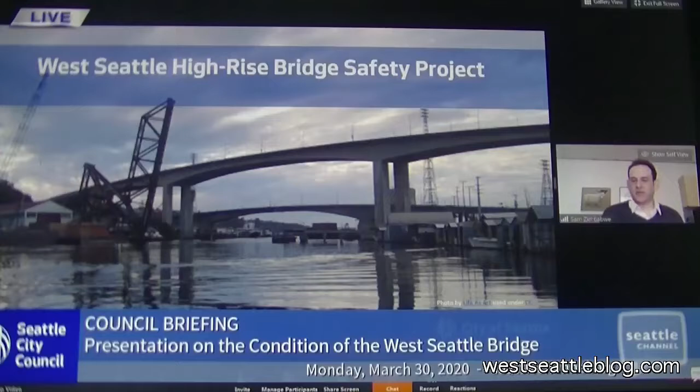So with that, we'll go to the next slide. This is just a brief overview - I'll try to keep an eye on time - but we're going to go through some of the inspection and maintenance history, our decision to close, our short-term recommendations, and what we're doing right now.

What we've done and where we're going from the traffic impacts, where we think we're going from our repair options, a little bit about what we're doing to communicate, and then how we're organizing ourselves within SDOT, and where we see as next steps. We'll try to do that as quickly as possible and then answer questions.

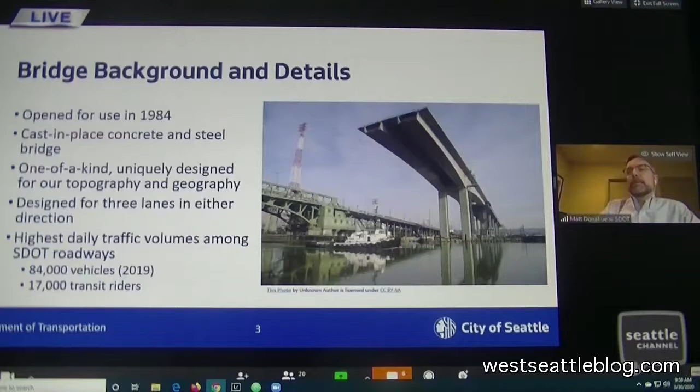Thank you, Sam. Good morning, everybody. So a bit of background on this bridge: it was built in 1980, or opened for use in July 1984. It was one of two bridges built to replace the old green bascule bridges you can see in the lower left-hand corner, after one of them was hit by a freighter in 1978.

In the upper right-hand section of the photo, this is actually a construction photo from when they were building the high-rise. You can see it's two cast-in-place segmental concrete box bridges—basically a reinforced concrete bridge comprised of two very large box beams with a monolithic slab tying across the top of those beams.

A few things to note as we get into the defects and deterioration found in our inspection program, and how and why that concerned us versus normal wear and tear. Reinforced concrete bridges are, to some extent, made to crack. We anticipate concrete will crack over time, and we perform design calculations to construct the bridge to accommodate that. As the bridge manager for the city, a professional engineer, and a certified bridge inspector, I don't like to see any kind of atypical deterioration.

So we're typically very careful to find any deterioration and quantify it, to make sure we understand whether it's the normal deterioration you'd expect in a structure versus something different.

A couple things to note about this bridge: it's very unique in terms of span lengths and overall height. It's built essentially for our topography and geography, to get up from the Duwamish River and into West Seattle, up the hill to the Alaska Junction. It was originally designed for 3 lanes of traffic in either direction, and although closed currently, it has 4 lanes in the eastbound direction and 3 lanes in the westbound direction.

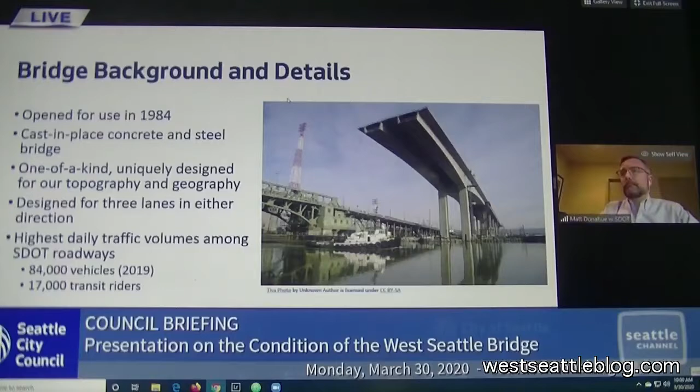A few comments on how we got here today and what our inspection program has looked like over the last several years. Every bridge on the National Highway System, monitored by the FHWA, State DOT, and down to city asset owners like us, is required to be inspected above water every 24 months, every 2 years.

In 2013, we had a routine inspection for this bridge, and that was the first time we noticed atypical cracking beyond what you'd normally expect for this bridge type. It triggered a close eye, and we hired a consulting engineering firm here in Seattle to work with us in 2014 to study this bridge and determine what was causing this atypical cracking.

The results of that study weren't particularly conclusive. They recommended or pointed out a number of things that could be causing it, but the recommended action was to continue to inspect on a more regular frequency, at least every year instead of every two years, and also monitor the bridge. That same year we installed crack width gauges with a consulting firm that links back to a website so we can monitor that data in real time. That instrumentation was put at each of the four distinct unique cracking locations that we've observed.

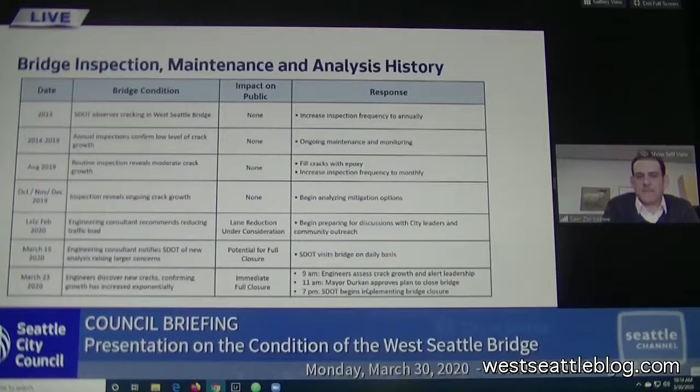And then from that point, once we have that level of recommendation, we can't take the time to brief everybody and make sure we have all plans in place. We have to take swift and decisive action. So I fully appreciate that there is frustration that we could have had some more discussion in the weeks leading up to it. We will seek to do that from here on forward.

There was also at that point not an indication that we had to take such swift action to maintain public health and safety. So again, I don't want to get too bogged down in this. I think we have a shared commitment to openness and transparency, and a shared commitment to informing and being open and transparent going forward.

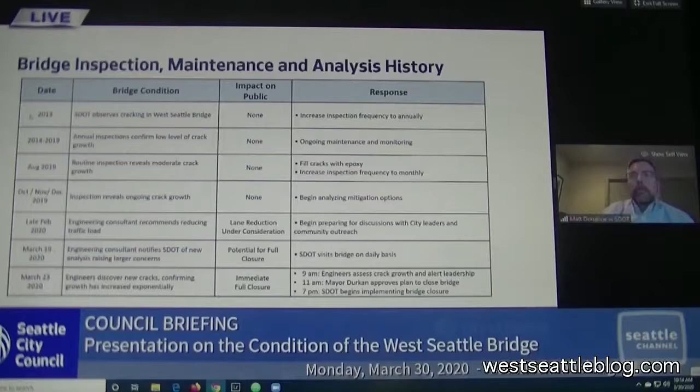That type of growth in a reinforced concrete structure is completely unacceptable. That's typically the type of growth you see over years, not over weeks and days. And so that drove me, primarily as a bridge inspector and the bridge manager for the city, to pick up the phone from inside the girder in the bridge and call Lorelei, my deputy director, to alert Sam that we needed to close the bridge that day.

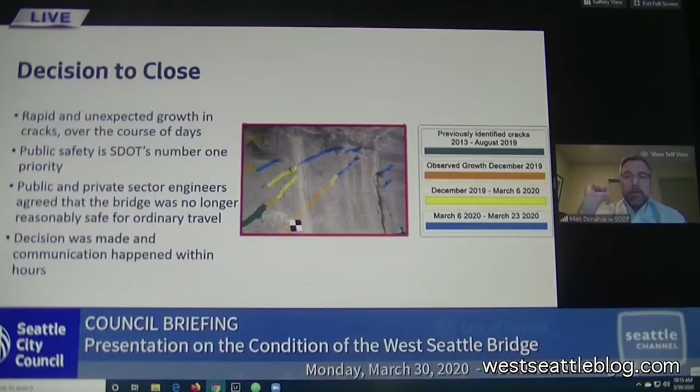That caused extreme concern with leaving live load, or vehicular live load, on the bridge, due to the risk to public safety. So we have a graphic here that shows that progression over months and then weeks towards the end of it.

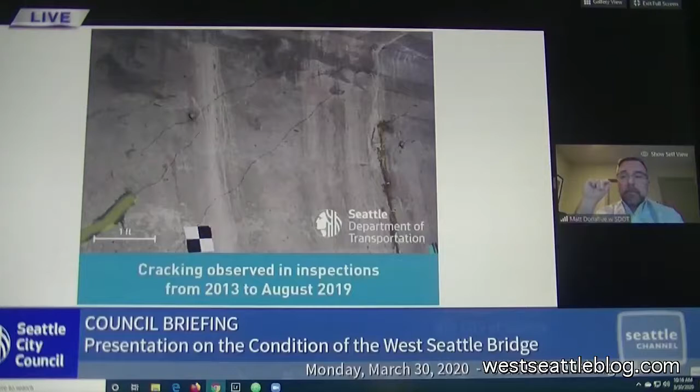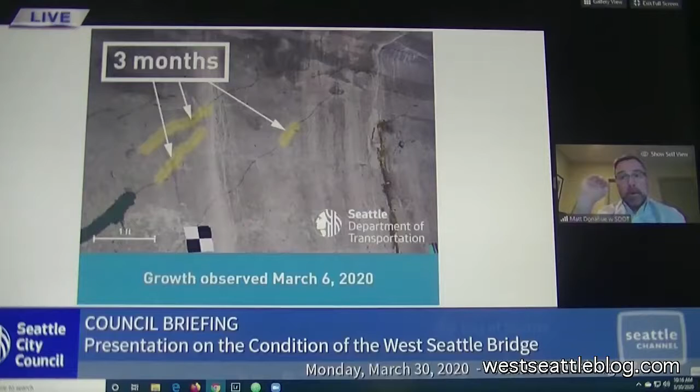The other thing to note here is that in the structural bridge world, angular cracks like that, or at a diagonal, are called shear cracks. That type of deterioration in a bridge will go until failure, and failure happens typically quickly and without warning, as opposed to other types of cracking not oriented that way. This exacerbates the concern, since it's a failure mechanism that could happen very quickly without the bridge deforming or changing shape before it gives way, in addition to the rate of crack growth.

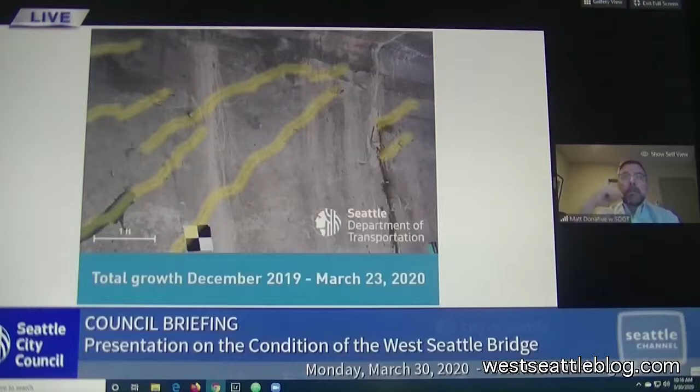So what are we going to do about it? Short-term recommendations for the high pass: we are and will continue to take all steps to maintain the integrity of the structure, and we need to return the bridge to normal operations as soon as possible. When we do the repairs, we're going to see if we can return some traffic to the bridge ahead of going back to full operations.

Part of maintaining the integrity was to restrict traffic, but we will be up there weekly continuing to inspect these cracks to make sure that what we think now, that the bridge can handle its own dead weight, continues to be true.

We've got a suite of instrumentation, mechanisms and techniques that will not only help us monitor the bridge, but help us gather early data on how the mechanics of these crack sections actually work, to help us start thinking about design or repairs even before we start the design process.

And back to the design process, we're looking at alternative methods like design-build or GCCM as a way to accelerate the design process and cut down on lead time for materials, which can become an issue.

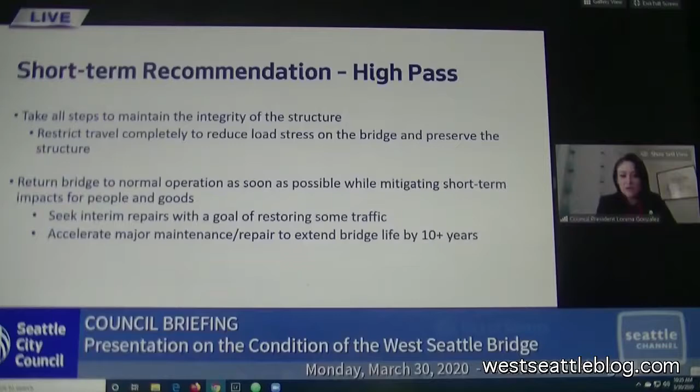So to a previous comment, we also are looking at the swing bridge very carefully. We've had some ongoing issues that we've been addressing over the past months, just in the normal course of asset preservation for this bridge, but now it's got a laser focus on it because it is the primary bypass route from the high pass for commercial freight, emergency responders, and transit.

So things we're doing right now and will continue to do are weekly inspections and monitoring of particular areas of this bridge as it continues to be more heavily loaded with traffic. We coincidentally, several weeks or a few months ago, began a load rating project for this bridge and the approaches on either side, so we're going to bring that to a close.

We've had problematic pedestrian gates that need to move and lock in a particular sequence in an opening cycle that we've had problems with, so those things have a particular long lead time. We ordered them towards the end of last year, recently received those, and we have a maintenance installation plan for that coming up in a couple weeks in April.

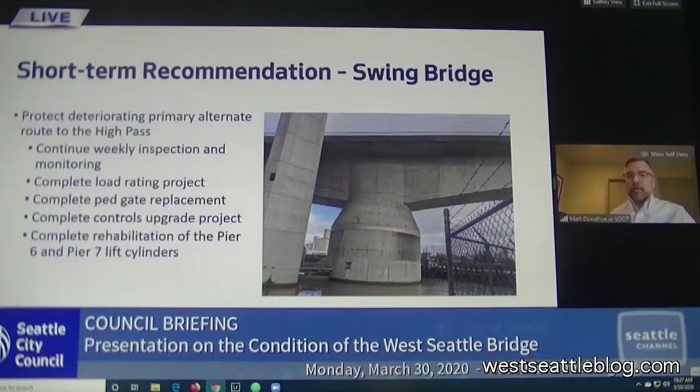We also have an ongoing capital project for the control system to replace the control system for that bridge. And as some of you may remember, in 2018 we had an outage of the Pier 6, the western side pier that's in this photo. The lift cylinder went out on us, so we had to pull it out and put in our spare cylinder. We're bringing a forensic analysis and rehabilitation program for that cylinder and the currently still-in-service Pier 7 cylinder this year. Next slide, please.

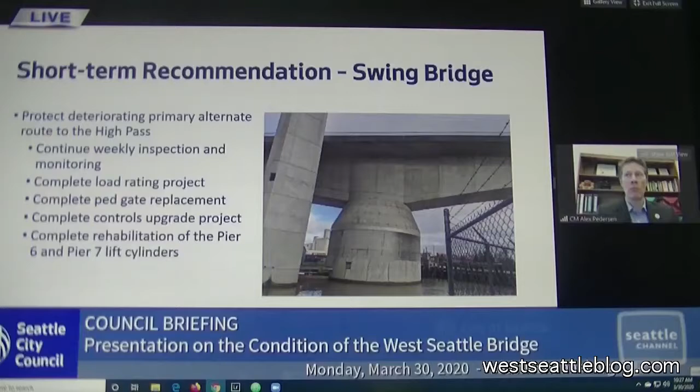And with that, I'll turn it over to Adiam Emery for the traffic management plan. Thank you, Matt. In regards to traffic, the level of effort and complexity of closing West Seattle Bridge is very similar to the viaduct, if not more complicated. Those two infrastructures carry the same amount of average daily traffic, the viaduct being 100,000 and West Seattle 84,000.

With the viaduct, we had ample time to develop strategies to partner with our partnering agencies to have trip reduction or enhance our transit routes and so forth, or inform the public in also participating in minimizing their trips. With West Seattle, we didn't have that luxury.

As stated prior, we implemented emergency closure a week ago within 5 hours. One of the things we understand is that West Seattle has very limited crossing points of the waterway, First Avenue South Bridge being the infrastructure that can address or handle a lot of the reroutes.

On the north end of West Seattle, we have Lower Spokane Bridge with very, very limited capacity, 20,000 being the maximum capacity it can handle, which actually translates to stop-and-go traffic if we allow about 20,000 people to utilize it. Hence, we've limited the usage of Lower Spokane Bridge for emergency responders, transit, and freight to make sure that we are not impeding emergency vehicles' response rate to West Seattle residents.

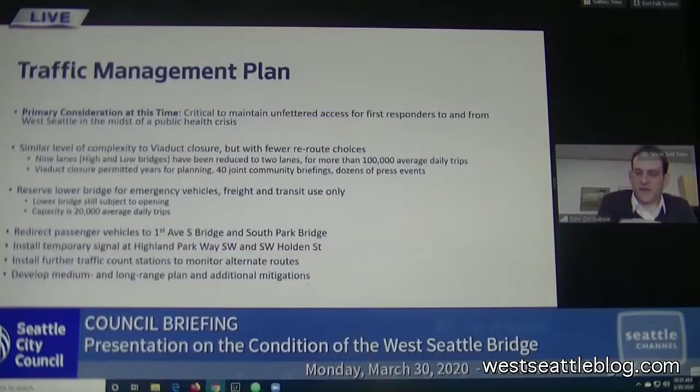And so if and when things come back to normal—and I'm optimistic that will happen soon—from a traffic perspective, we've got to be very careful about not overstressing our infrastructure, knowing these impacts exist. So we are very committed to sharing and figuring out the best ways forward. During the viaduct closure, we created dashboards where we communicated on an automated basis what the traffic impacts were. We're very committed to doing the same thing. This unfortunately isn't going to be a short-term issue, and we're going to have to figure out ways to share information and adapt as we go.

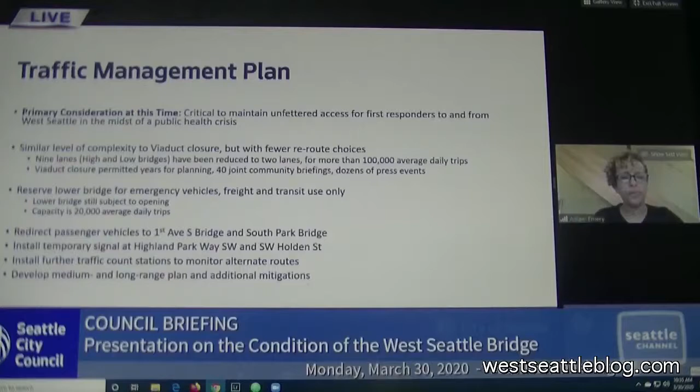That's right. Next slide, please. The detour map indicates, as we stated, where the detours are, advising everyone to head to First Avenue if you're heading in, while limiting the Lower Spokane Bridge.

I want to acknowledge that especially for people living in the north end of West Seattle, we're asking them to travel—adding about 5 more miles to their travel time to get back onto 99 via First Avenue South. We recognize that could be a challenge for some, but as Sam stated, when we go back to normal, this requires a special effort where the number of trips needs to be reduced to mitigate this impact. Right now, with regional volume reduction, we're not seeing that many impacts, but given the level of traffic moving on the West Seattle Bridge daily—84,000 vehicles—it's going to require a lot of strategies to reduce the number of personal trips we're making moving forward.

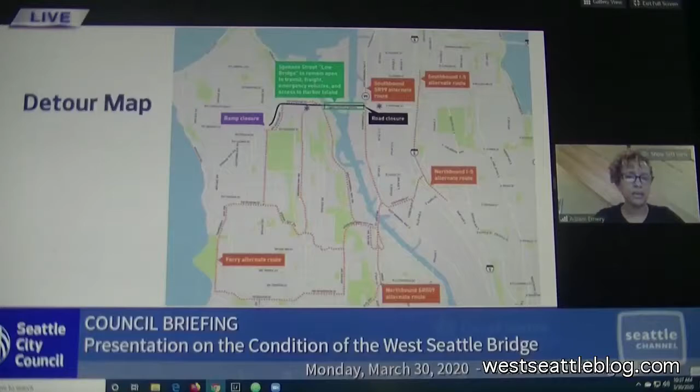So next slide, please. This is just reiterating what Sam indicated—we're planning what the strategies will be as we get back into normal traffic patterns. We have a task force set up with King County Metro and the Port to strategize how we handle this impact introduced to our network, and we anticipate implementing the same level of effort that we saw during the viaduct closure moving forward.

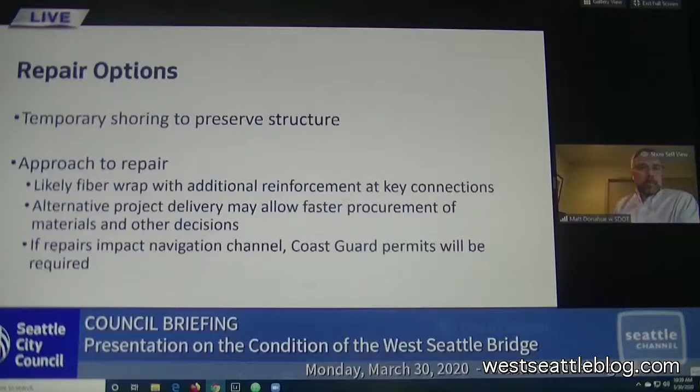Sure. So just trying to wrap up here as well, and thanks to everybody for their time on this. We've already talked about our commitment to openness and transparency. We've stood up a website and we're continuing to share this information. We have an ongoing partnership with the Department of Neighborhoods to connect with community and open those feedback channels so that we can problem solve in real time with people, and make sure that we keep everybody up to date as new information is available, with a regular rhythm of information to share, and as we come upon major milestones.

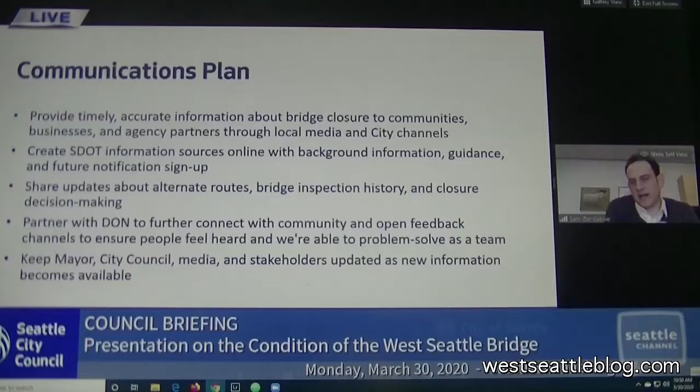Our last slide, and I know we've had a lot of this dialogue along the way, but really just about how we're structuring ourselves very quickly to tackle this. This is not something that falls within one work group within SDOT. It's really touching all of us very quickly.

Folks know, I think, Heather Marx, who was instrumental in our success around the viaduct closure last year, bringing public information and bringing together all the things that needed to happen from an SDOT perspective. I've asked her to take the lead on coordinating all of the work that needs to happen with West Seattle Bridge. Matt, who you've heard from, is leading on the structural aspects.

Adiam, who you've heard from, is leading on the traffic management aspects. Dan Anderson, who's been leading a lot of our communication on the Delridge multimodal corridor and Delridge RapidRide investments, and so has a lot of ties and knowledge with community, is leading on our public information. And Emily Reardon, our deputy chief of staff, is our agency liaison, working with other agencies and bringing people together very quickly. For you all on the council, Shauna Larson, our council liaison, is also an invaluable resource for you in terms of channeling questions or requests through Shauna. She's tied in with this team as well.

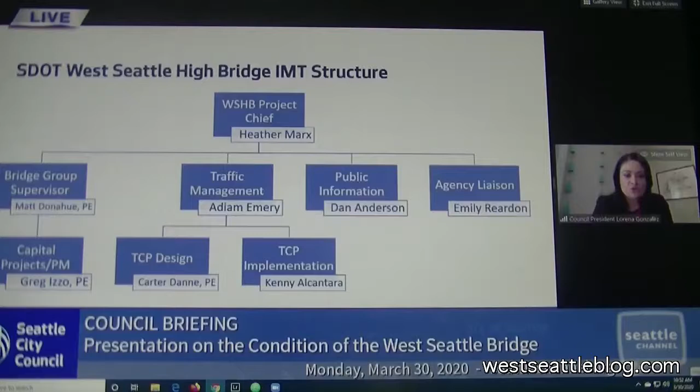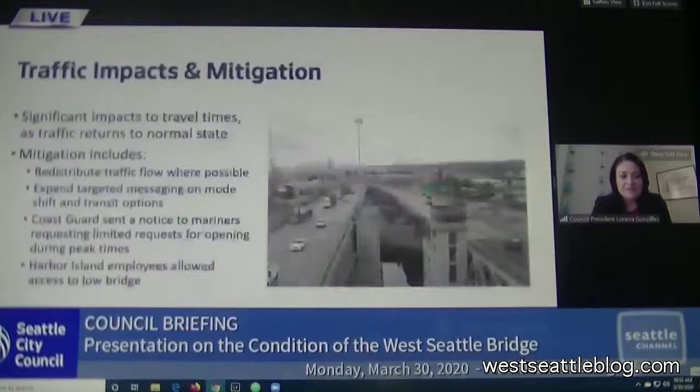Before we conclude, I know that Councilmember Herbold has another question about next steps, and so I'm going to go ahead and hand it over to her, and she might actually be gearing up to ask the question I was thinking about. So I'm not going to ask my question until I hear what Councilmember Herbold has to say.

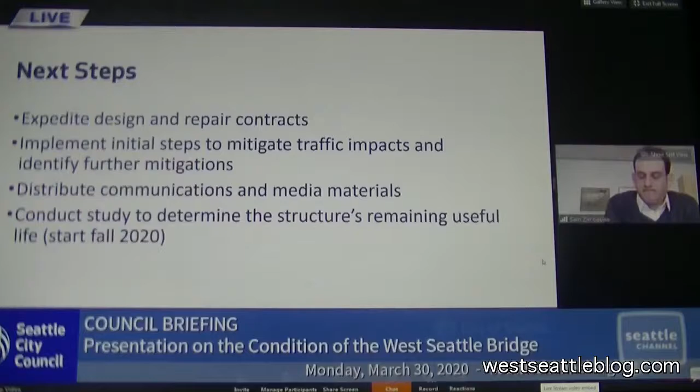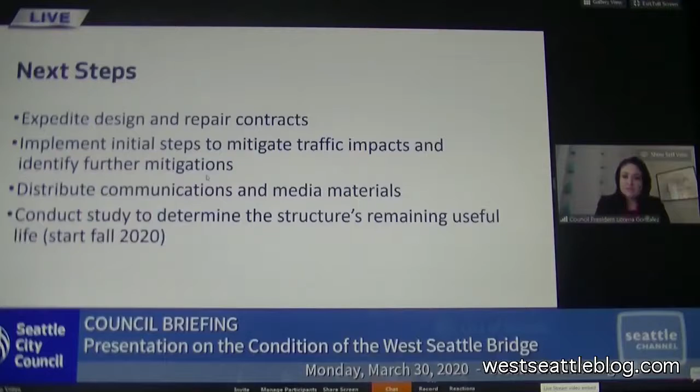Absolutely. Great. I don't have any other questions at this time. Are there any of my other colleagues that have questions before I close out this presentation? Okay, I'm not hearing from anyone.

I just wanted to really quickly thank SDOT for all of the quick work that you all did. I think, obviously I expressed some frustration at the top of the presentation as it relates to the timing of when notification was given to us, but I don't want that expression of frustration to minimize the hard work that I know that SDOT is doing.

I want to especially thank Matt for his quick work in recognizing that this was a serious public safety issue for the people of Seattle, and I can only imagine how significant it was for Matt to undertake that decision and to see what you saw in that moment with your own eyes, to be able to make that call and to do it quickly for the best interest of all users of the West Seattle Bridge.

I really just want to thank you, Matt, for making that tough call and for doing the work that was necessary to make sure that we as a city acted quickly to preserve life and safety. I know that this is an inconvenience for many folks in West Seattle or people who come in and out of West Seattle, but at the end of the day, we have a paramount duty to preserve life and safety of those people who use or may use the West Seattle Bridge, and I'm really proud of the work that SDOT did to step into action to do that.